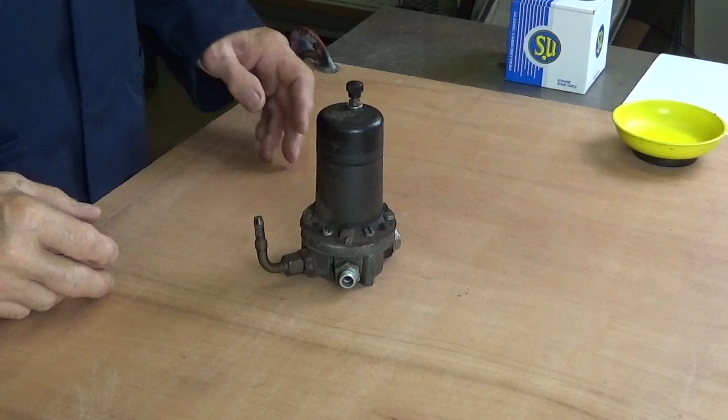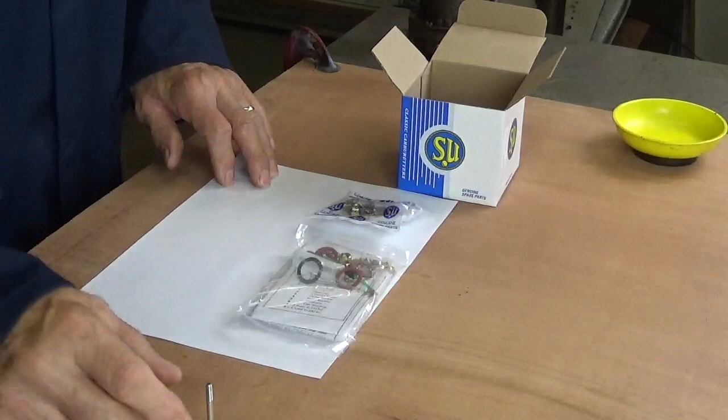This is the fuel pump we're going to repair. To make the video as short as possible, I've already slackened off the screws and all the nuts. This is the repair kit as supplied by SU. We have a new set of points, washers, nuts, etc. New diaphragm, new coil spring, and a couple of new gaskets.

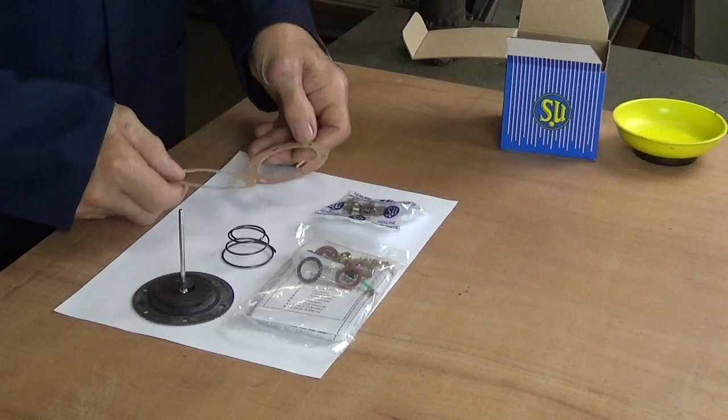As always, there's a set of instructions. It's always a good idea, even if you've done this before, to double check there have been no changes.

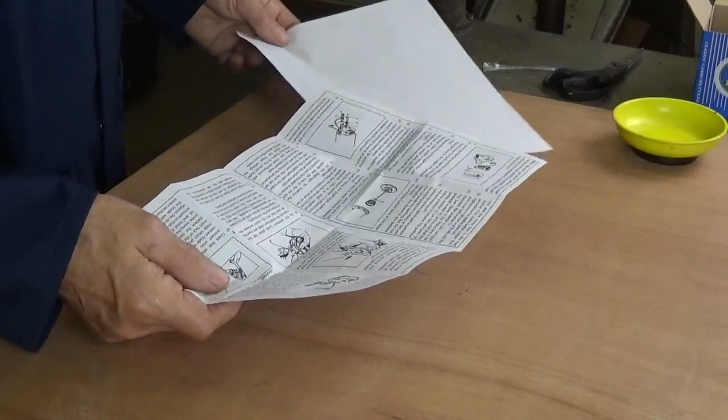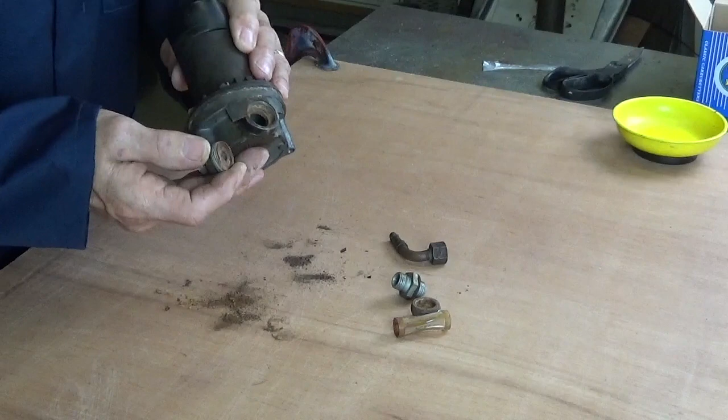Inside we can see the non-return valve. Cleanliness while rebuilding this fuel pump is essential, by the way.

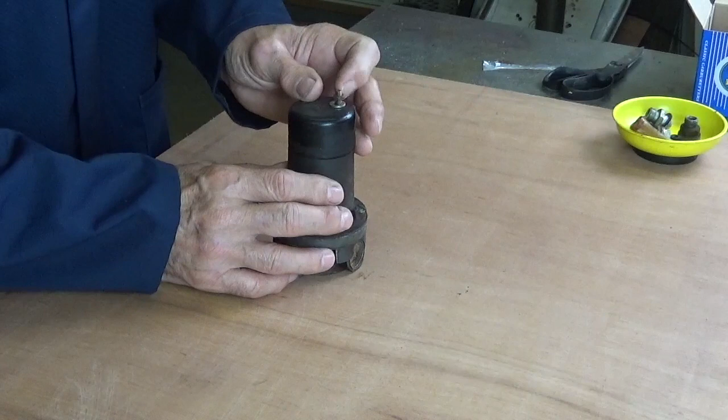Remove the electrical connection at the top. Remove the plastic cover. Inside you'll now see the point system and what they call the rocker mechanism, which we'll come to a little bit later.

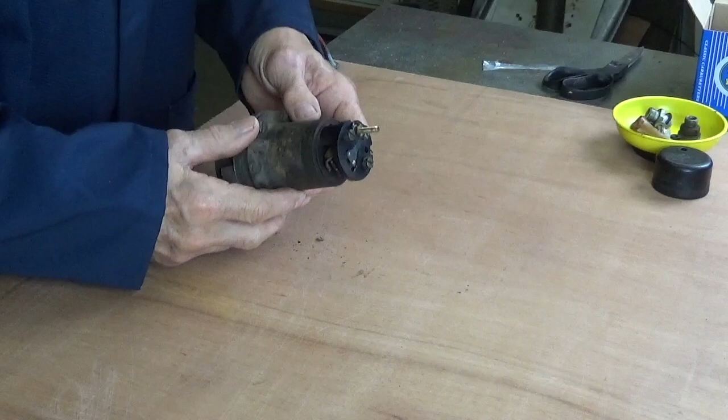First we remove the screw that holds the contacts in place.

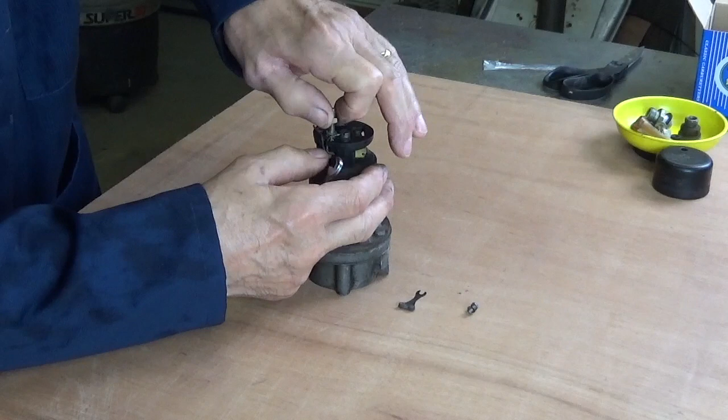We remove the 2BA nut on the connection bolt. It's usually quite stiff because underneath this nut is a lead washer. The lead washer is to make sure you get a really good connection. Now that lead washer leaves a residue on the thread, so getting the nut off can be a bit of a pain. The brass 2BA bolt that we're undoing the nut from has a square end.

It sits in the pedestal to stop it turning. But of course as soon as you start taking the nut off, it all flops about, so quite often you have to put a screwdriver underneath it to hold it into position to make it a little bit easier. Then you unscrew what's left of the old lead washer.

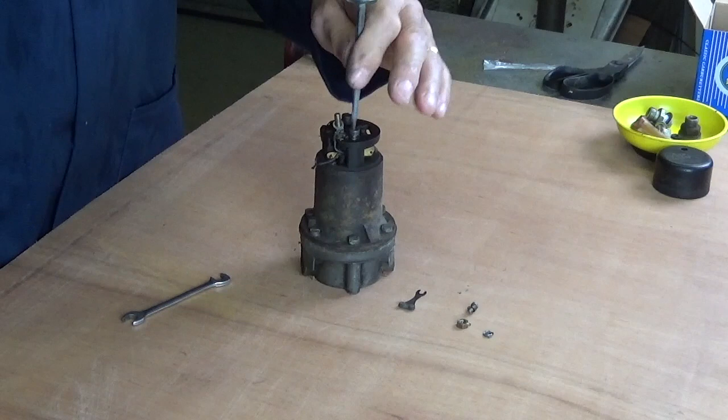Now we remove the two screws that hold what they call the pedestal on the top. The pedestal is made of plastic and it's a little bit fragile, so be very careful with it. Remove the pedestal and the electrical connections.

You need to pull out the hardened pin. It's part of the toggle mechanism. When you refit this, make sure you fit a new hardened pin. If you fit anything else, it will wear out very quickly. Have your pedestal.

That is the rocker mechanism, also called the toggle mechanism, in operation there. You can see the double contact points there, which is what usually goes wrong with these pumps. They finally burn out.

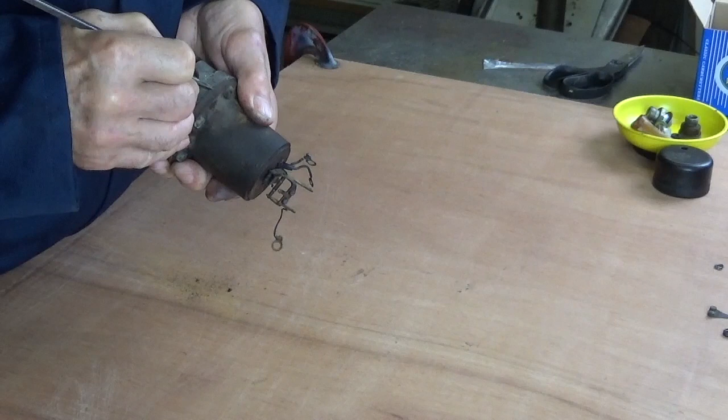I like to scribe right across the joints so that when it comes to reassembling, you've at least got a guide of how the thing went together. Remove the screws that hold the coil body to the alloy base.

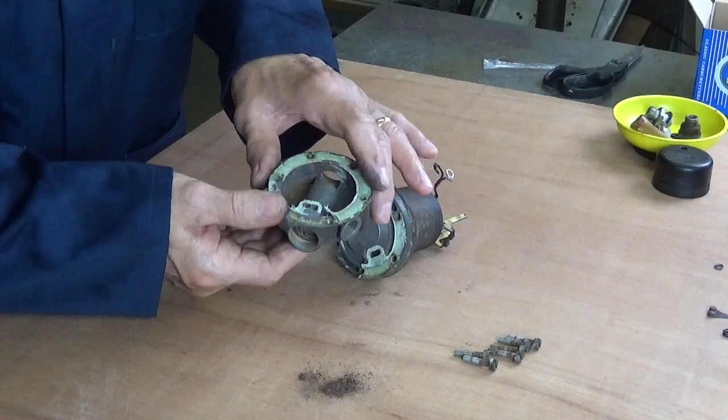It's quite a difficult thing to separate, so you can see why you need new gaskets. By the way, when you're reassembling this with the new gaskets, whatever you do, don't use gasket cement, because there's a good chance you're going to have to take it apart a few times before you get it right.

Carefully use a sharp blade to separate the coil body from the diaphragm. Be very careful not to damage the diaphragm, just in case you need it later. Peel off the diaphragm from the coil body.

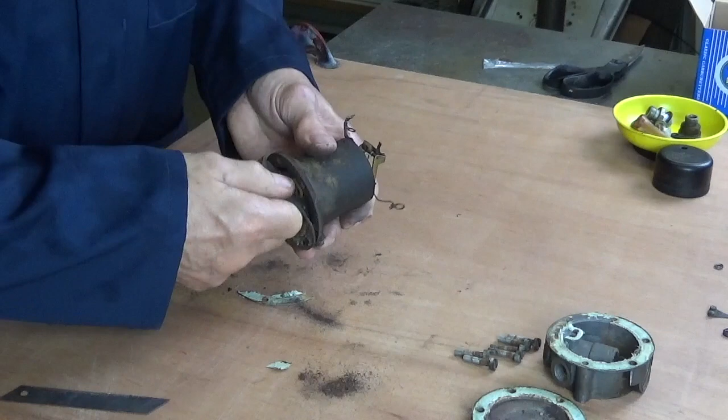Now you need to unscrew the diaphragm so that it detaches itself from the toggle mechanism on top. Gently remove the diaphragm and the spring from the coil body. Check the diaphragm for excessive wear.

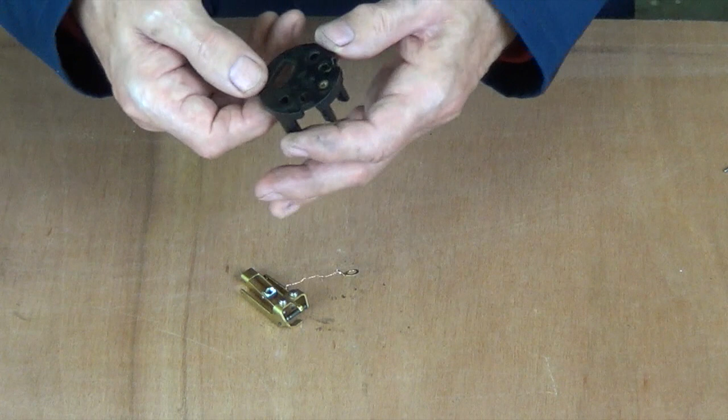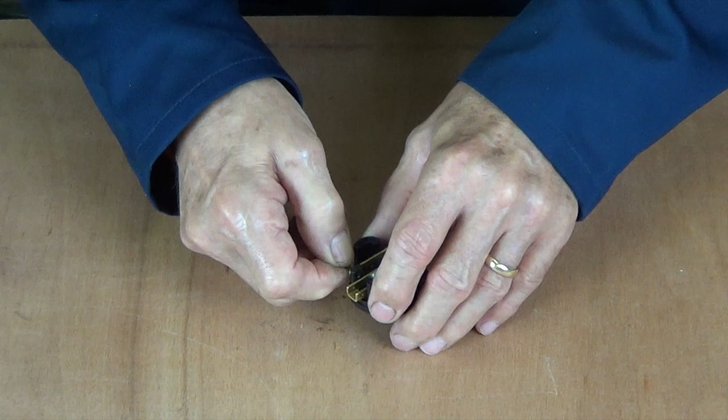Now we're going to start to reassemble the toggle mechanism. Now this could be quite fiddly. You're going to have to insert the hardened steel pin and line up the six holes. It takes a little bit of patience.

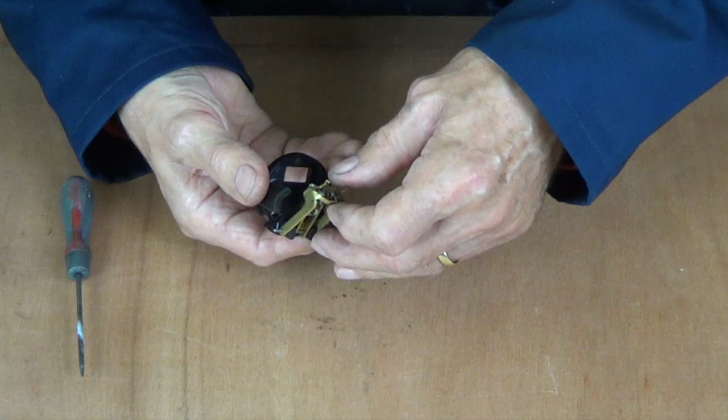When you're assembling this top part of the electric fuel pump, you have to remember that hardened steel pin is kept in position by the plastic cap that's finally fitted. So all the time you're working on this, keep an eye that the hardened steel pin doesn't drop out. Just make sure that the toggle mechanism works freely.

Next we insert the brass 2BA bolt with the square end. As you'll probably notice, as I'm assembling this, the old parts I've actually cleaned and, if necessary, painted. Alloy base parts I've sandblasted.

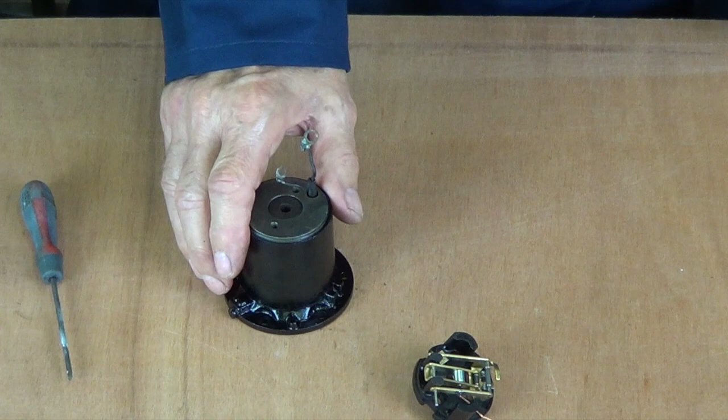Next we insert a washer onto the brass 2BA bolt. Position the pedestal over the top of the coil body and generally line it up. This is where we slip the power wire to the points, gently over the top. It's very, very fragile, so do be careful.

This is the lead washer that I mentioned. Very, very important to make sure you get a good electrical connection. This has to go on next, on top of the power wire.

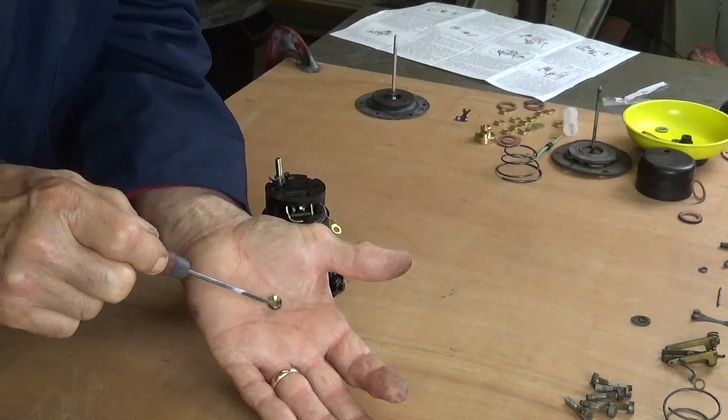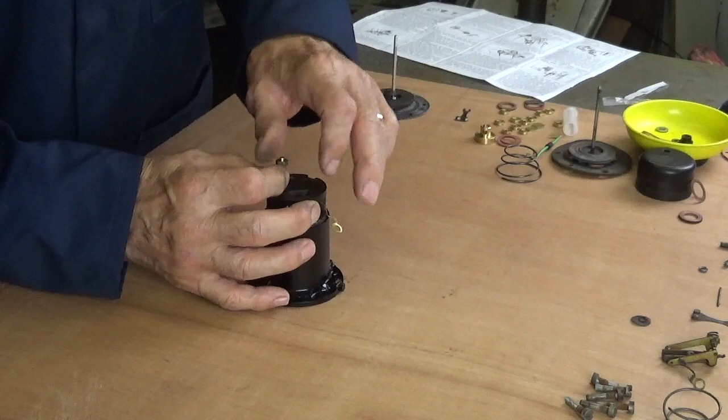Now this is a special nut that goes on next. It's cone shaped underneath, and the cone shape should go downwards so that as you tighten it up with the nut, it pushes and expands the lead washer to make sure you get a good connection. Now we put on the 2BA brass nut, wind it down carefully and very, very gently tighten it up.

Now the washer I'm just putting on, the instructions suggest this, but it depends which plastic cap you've got whether you put this washer on or not. The best way is to put the washer on and try the cap. If the cap is too far away, take the washer off and try the cap again.

Now we put the 2 screws in that hold the pedestal onto the coil body. Again, don't over tighten, or you'll break the pedestal.

Now I don't know if you've seen the deliberate mistake, or should I say the first mistake of the day. I put the screw on and I should have actually connected it to the earth wire. The earth wire is very fine, and as you'll see, I'll take the screw out, put the earth wire on, and then connect it back up again.

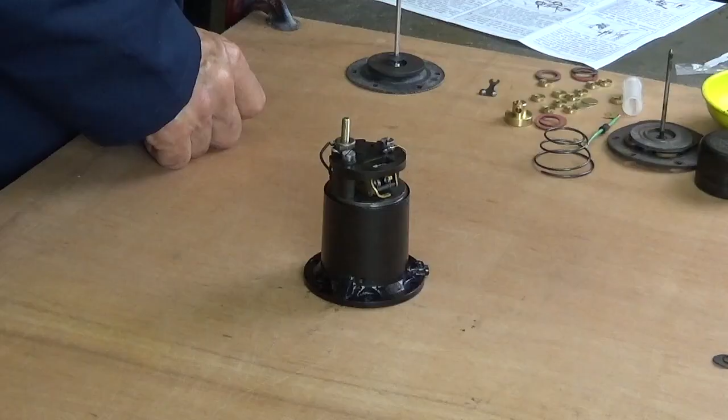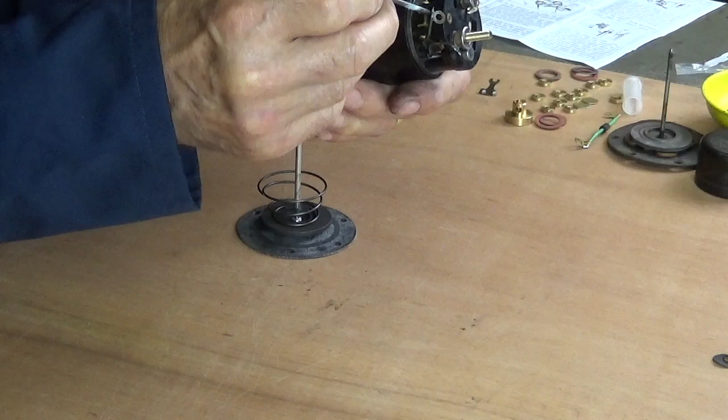Next we have the new diaphragm. We're going to fit the new spring with the large end of the spring towards the coil body, before you try and screw the shaft in the center of the diaphragm into the trunnion, or the threaded part in the rocker or toggle mechanism.

You need to make sure that the little neoprene washer is on that shaft. This acts like a bump stop, so as the diaphragm is going up and down, it doesn't slam into the bottom of the coil body.

With some patience, you'll find you'll make the connection on the thread, and you gently turn the diaphragm so it screws into the toggle body. This is the sort of situation that when you read it on an instruction sheet, it makes no sense, but it's so much easier if you can see it done on a video.

By pushing the diaphragm gently up and down, you can make the toggle throw over. This goes up to one side, down to the other side. We'll see how that goes a little bit later.

Now this could be really fiddly, but with a little bit of practice, you'll see. If it doesn't work, screw it a little bit more, try it again, push the centre of the diaphragm in, let it come out. This is going backwards and forwards on the spring inside.

Finally, you'll get the toggle body to throw over. You'll see it, it'll go click, click, click, click. And this is the sound that you get when the pump is finally working.

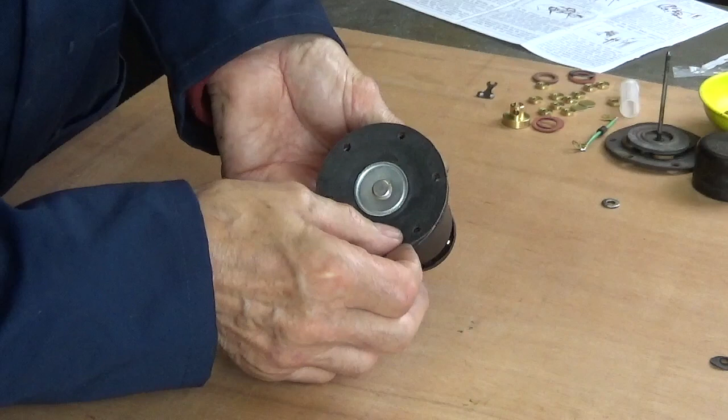Once you're happy that the toggle mechanism is throwing over, now unscrew the diaphragm to the nearest hole to the left. Again, another 4 holes - that's 2/3 of a complete turn. The diaphragm is now completely set.

So say the instructions. But in reality, you'll have to assemble it, try it. If it doesn't work, take it apart, screw it back another hole or 2, and keep doing that until you get it just right.

Now it's very likely, if it's an older pump, there is an armature guide plate. This is a plastic ring with discs on it, is the best way I can describe it. It clips round the diaphragm and it keeps it central as it goes in and out on the coil body.

Now in the new kit, it's very likely they'll be supplied with little brass discs. You're supposed to insert these all the way around, and this is supposed to do the same job. Frankly, I always use the old part - it's very easy, it just clips in. Why they changed it, I have no idea.

Now we need to install the contact blade. First we put the screw and washer through the power wire and start to screw that into the top of the pedestal. The contact blade has a fork on the end that slides in underneath the screw and washer. Gently tighten the screw, and ideally get the contact blade just slightly above the contact points below on the rocker when the points are closed. As the pump operates, the points will wipe each other and keep each other clean.

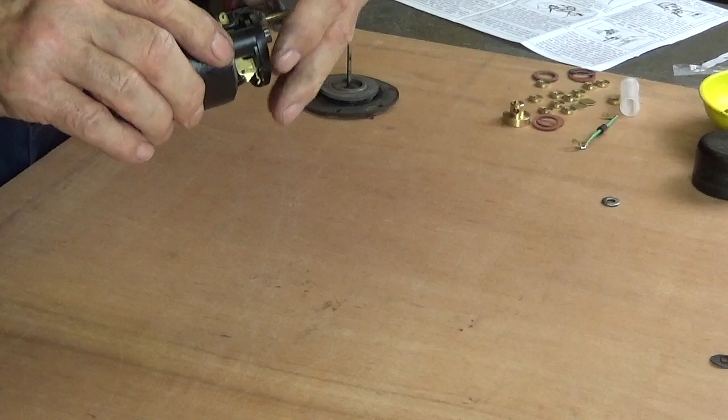You want to make sure the power feed wire is tucked away nicely, because as you put the plastic cap on, it'll foul it.

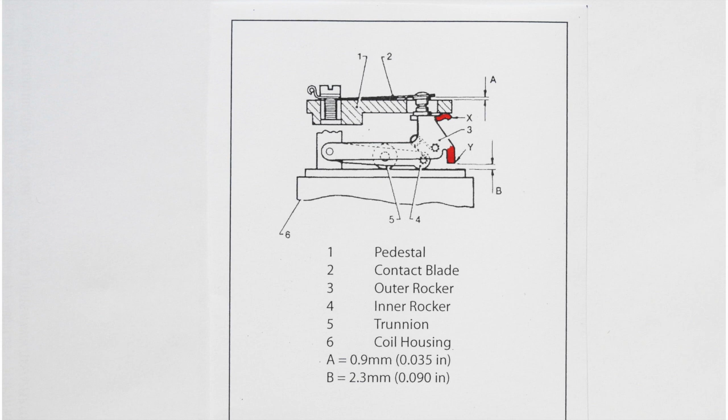This is a line drawing from the SU Carburetor Company workshop manual. It shows which parts we're going to adjust with our feeler gauges. A at the top needs to be 0.9 millimeters, or 35 thou of an inch, and B needs to be 2.3 millimeters, or 90 thou. I've marked them in red because it's difficult to explain without a diagram.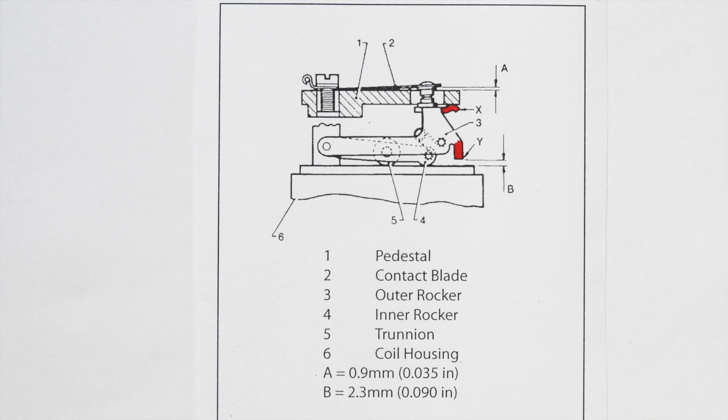The red part marked X at the top can be bent very slightly up or down to get the right adjustment for A. Y on the diagram can be bent up or down to get the right adjustment for B.

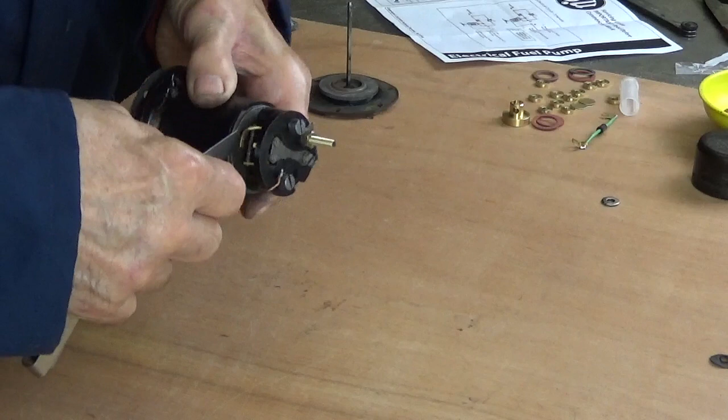Now we want 90 thou, or 2.3 millimeters, for the bottom foot. It's a little bit tight, so we just adjust that one. In this instance you can use a screwdriver very gently. Now for the top one we want 35 thousandths of an inch. My lucky day, exactly right.

Now we assemble the bottom part with new gaskets. As I said before, don't use gasket cement.

Do a test run with a 12 volt supply. This pump is off my Riley, which has a negative earth.

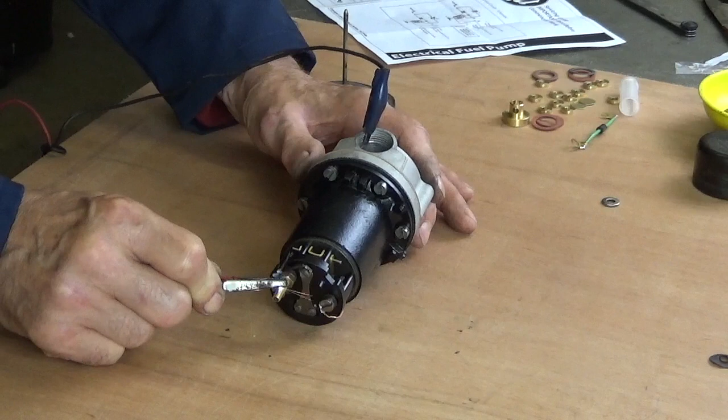No, she's not working correctly. The points are not throwing over. Obviously I've adjusted something incorrectly, so we take it apart again. Hence, no gasket cement.

I'll just unwind the diaphragm a little bit, try it again, and make sure that the point system at the top is throwing over correctly. No, I'll unwind it a little more. That looks more like it, we'll give that a try.

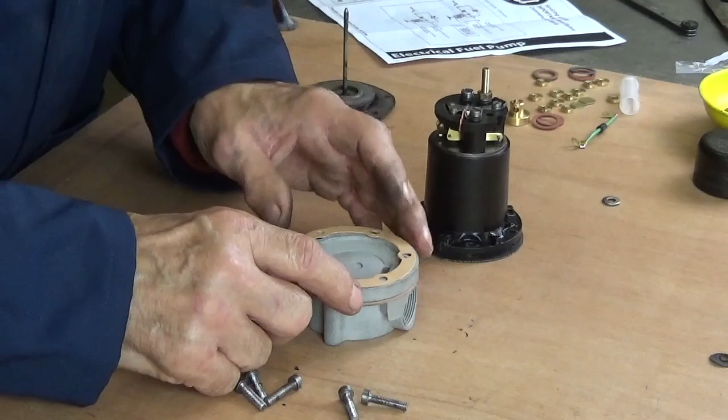That's the sound we should be hearing. That's the sound that, when the pump is fitted to your car, you hear: tick, tick, tick, tick, until she pumps up fuel, and then she'll just go tick, tick as she continues to keep the pressure on. That's the side view of the point system throwing over.

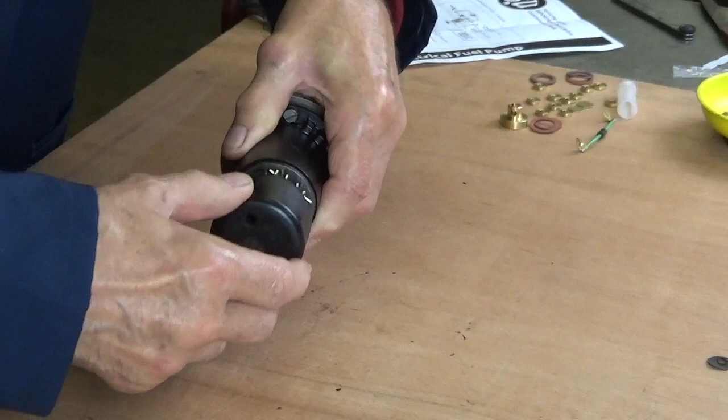This is a possible fit problem. When the plastic cap is fitted, if the gap is too great between the plastic cap and the coil body, you need to take that extra washer out. You put a washer on the outside, put the 4BA nut on. Don't forget, don't over tighten it, this is plastic.

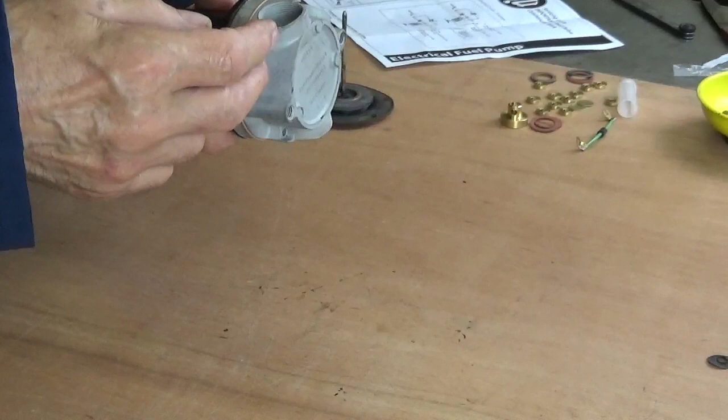Now we're going to reinstall the new fuel filter on the bottom, plus the fibre washer, plus the outside nut.

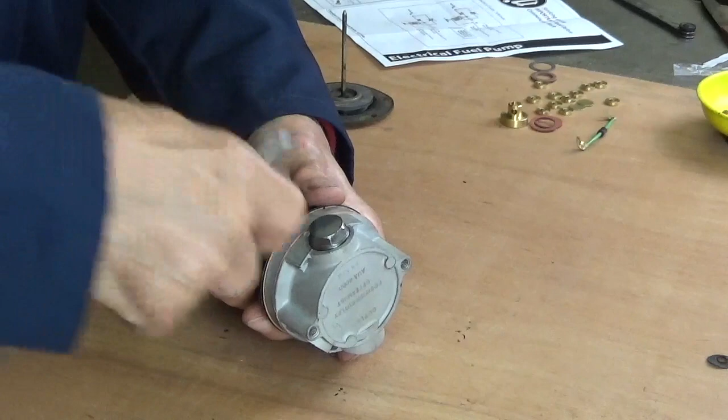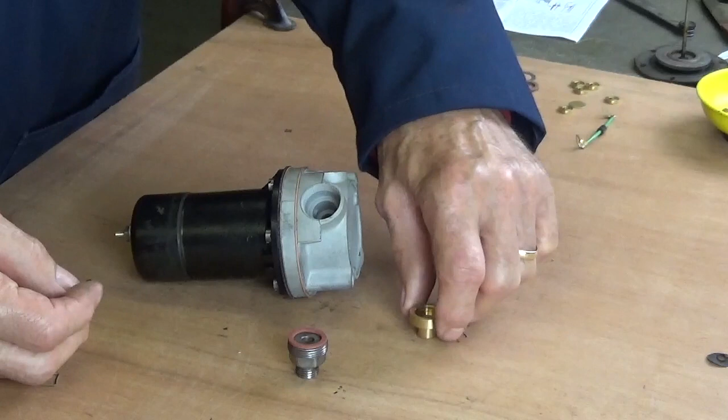Next, it's time to fit the non-return valve. We want to install the brass disc in the cage for the non-return valve, with the smooth side towards the valve seat. Next is the retaining spring. Now be warned, be very careful installing this spring.

If you don't get it right, it will go ping and you'll spend the rest of the day crawling around on your hands and knees trying to find it.

First we want the thin fibre washer. Next we install the first brass disc. Next the valve disc cage is inserted so you can see the spring when it is fitted into the pump. Then we fit the final fibre washer and the outlet fitting.

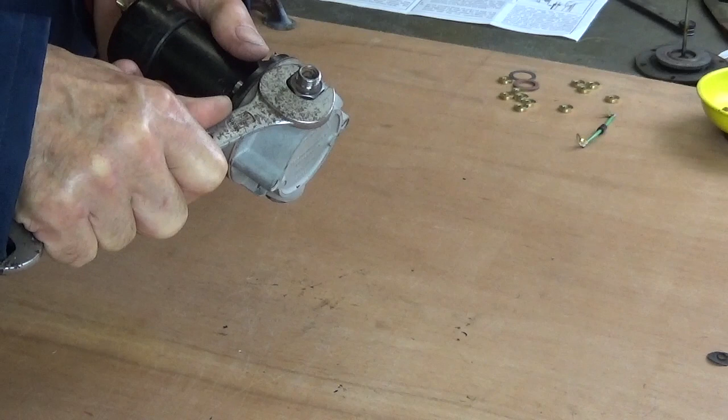Then we fit the fibre washer onto the inlet fitting and screw the inlet fitting into the aluminium body. Next we put some electrical tape around the joint between the plastic top and the coil body to keep any moisture out. Finally, fit the outlet fitting.